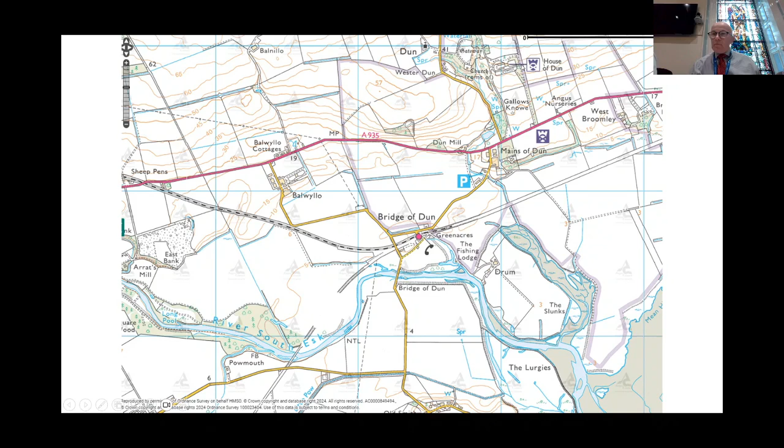Bridge of Dun railway station and the River South Esk, with Bridge of Dun located to the south, and Montrose Basin and the various environmental designations associated with the basin located at the south-east, or bottom right corner, of the slide that we see here. Perhaps also pick out House of Dun, located a short distance to the north-east of the application site, just again in the area identified by the cursor.

If we move on, we have an aerial image that shows the extent of the application site. Again, A935 public road running along the top of the application site, and the unclassified Mains of Dun to Balwyllo road running to the south. It's from the south that access would be taken, all vehicular access taken from this point to the west of the 3 cottages at Mains of Dun. So access taken from the point that we see here.

Again, just in terms of this aerial image, you can see significant woodland located in the top right-hand corner of the slide. This provides a significant screen between the proposed development site and House of Dun. So House of Dun, an important listed building, but there is very effective screening between that property, between the policies of the listed building, and the application site itself.

I've mentioned the Mains of Dun cottages, just in the area identified with the cursor, and we have Dun Mill located just again in the area identified by the cursor, and I believe we have a speaker from that property who will address committee later on.

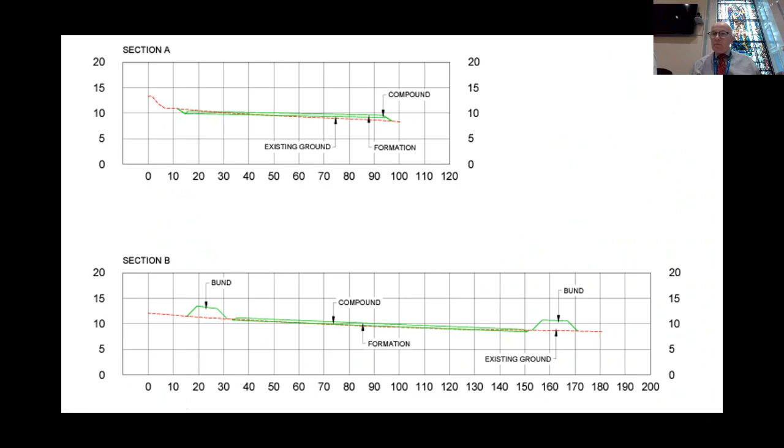Two access points taken from the main access track. Some concerns raised in objections regarding safety and reference to Fire Chief's guidance. Fire Chief guidance suggests 2 access points to the compound in order to deal with any emergency situation that arises. Again, that guidance refers to a minimum 25-metre separation distance between battery container units and any neighbouring habitable property. In this case, the closest habitable property is around about 250 metres from the application site.

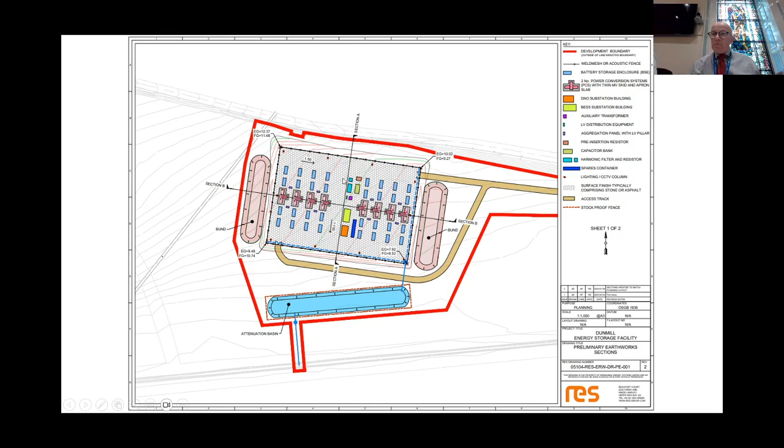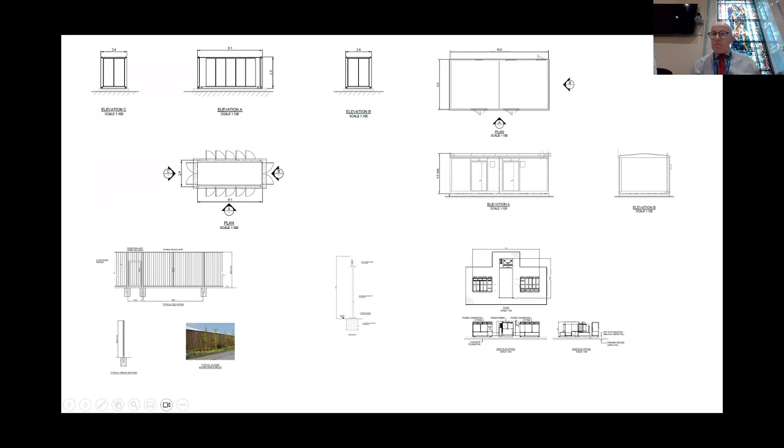Just in terms of the apparatus itself, won't linger too long on this. We have the proposed storage container unit, a fairly standard unit that members are now familiar with. A substation type building would be the highest building within the site at just under 5 metres in height. An acoustic fence would surround the development, roughly 3 metres in height. We have some CCTV cameras and lighting poles, roughly 4 metres in height, and you can see some of the other apparatus varying in height, roughly 2.5 metres, located within the development site itself.

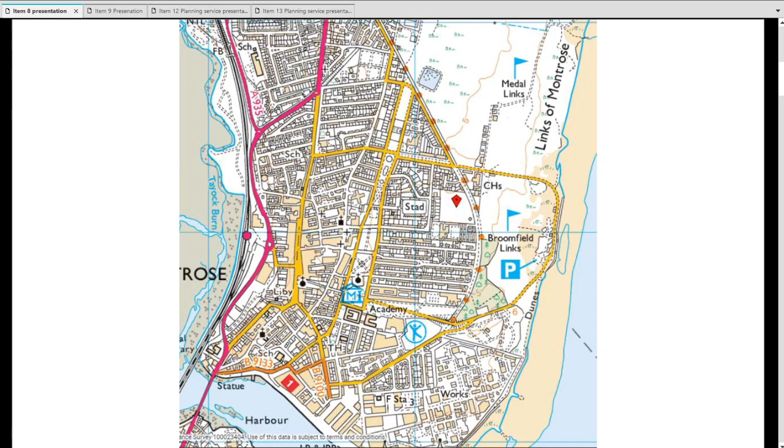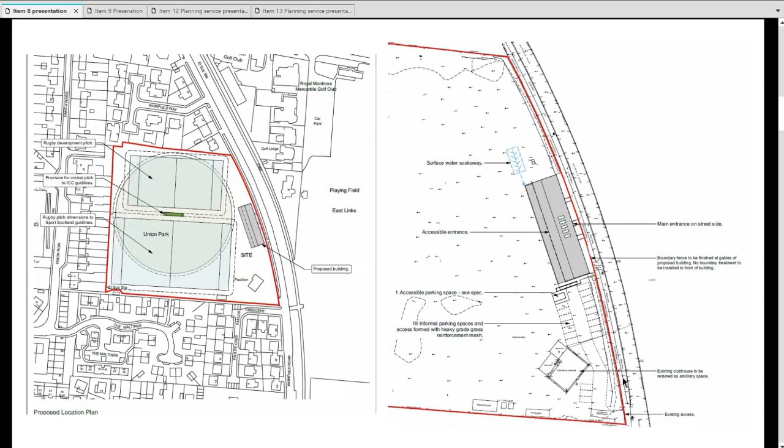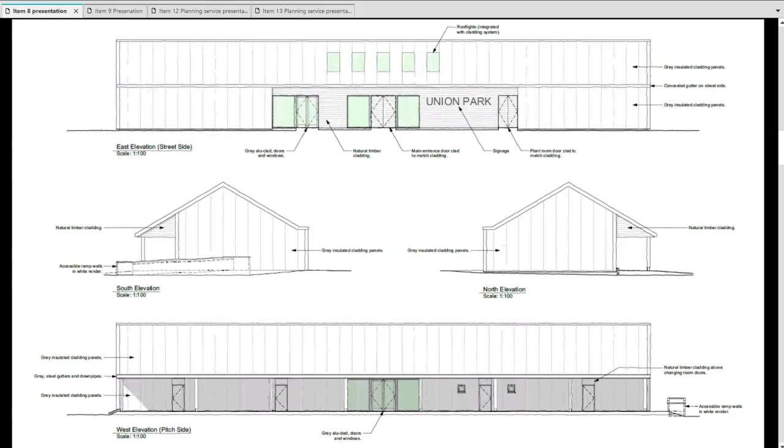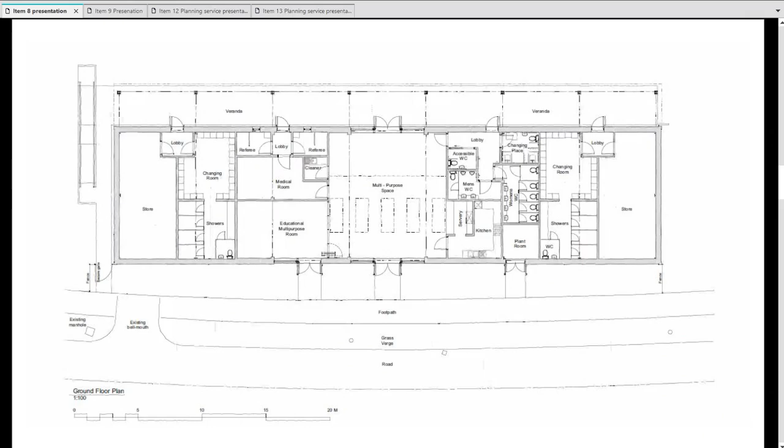Those circumstances include where the proposed development is ancillary to the principal use of the site as a recreational resource. While the proposal would result in a reduction of available open space, it would not adversely affect the existing sports pitch provision, and it would improve the facilities available for those using the pitches. It's ancillary to the existing sports use of the site, and Sport Scotland have raised no objection to the proposal. It is indicated that the building would also be available for community use, and in very broad terms, the principle of this development is acceptable in this location.

Two letters of representation have been received from residents located in proximity to the grounds. One raises questions regarding possible wider use of the site, including hours of operation and alcohol licensing. Some information on the anticipated level of community use and hours of operation have been provided by the applicant, but these are not matters that the planning system can control in this case. It is indicated that the building would not be licensed, but that's largely a matter for the licensing authority to consider if it receives an application of that nature.

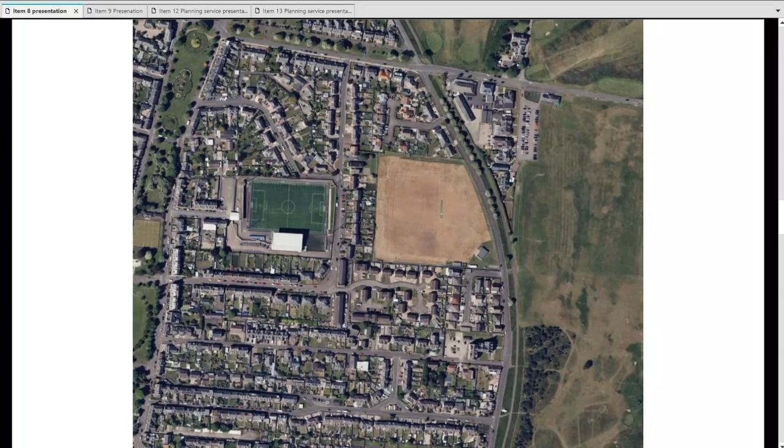Lastly, concerns regarding impacts upon access, parking and road traffic have been raised. The site is in a location that is reasonably accessible from the wider town by pedestrians, and there's also no designated parking within the site at present, but existing on-street parking is available on Whinfield Road for users of the existing sports pitches. As you can see here, this is Whinfield Road, where there's ample parking available on site. The proposal is unlikely to result in a significant increase in traffic, but the proposal would provide for 20 new informal hardcore on-site parking spaces, and a condition is suggested to ensure that these are provided. The Council's Road Service have considered the proposal and offer no objection, subject to the provision of 10 cycle parking spaces within the site. On that basis, it's considered the proposal would not significantly affect parking provision in the area or cause any significant issues in terms of road traffic or pedestrian safety.

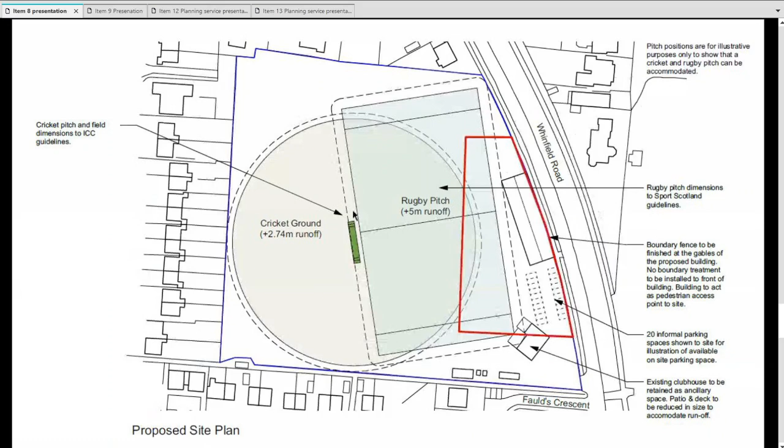This and the following slides relate to a very similar proposal that was previously approved by committee on the site in 2019. However, this permission has since expired. As you can see, there's a similar rectangular building with 20 parking spaces located in the east of the site, and the playing fields retained to the west. The building approved at that time was approved subject to similar noise conditions as those proposed in the report before members today. This slide here shows the elevations and layout of that building that was previously approved, and again the appearance of the building is very similar to that currently proposed. Although NPF4 has been introduced since that decision was issued, relevant policy considerations have not changed to any significant extent, and therefore this 2019 permission is a material consideration which merits some weight in considering the current proposal.

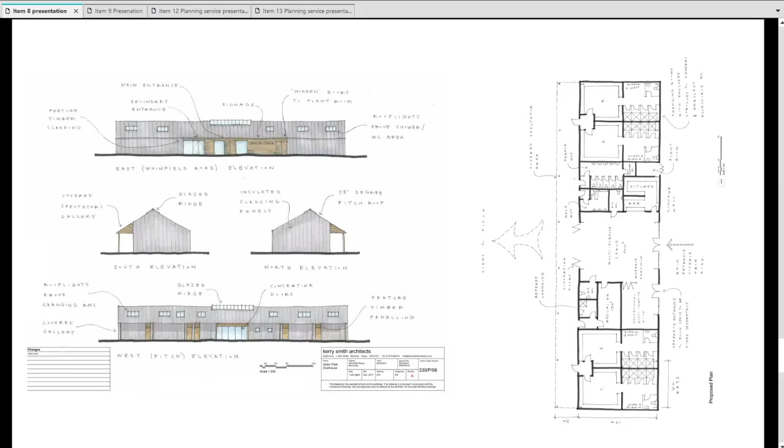Returning to the current proposal, the application relates to the erection of a community sports building within a site which is currently used for sporting activities and which previously benefited from planning permission for a very similar development. The new building might generate additional usage and greater activity in the vicinity, but this would not be unacceptable given the nature of the area. The building is located some distance from neighbouring properties and is of acceptable design, and concerns raised by third parties have been taken into account, and conditions are proposed to address those concerns where appropriate. Therefore, the proposal is recommended for approval, subject to the conditions listed in the committee report.

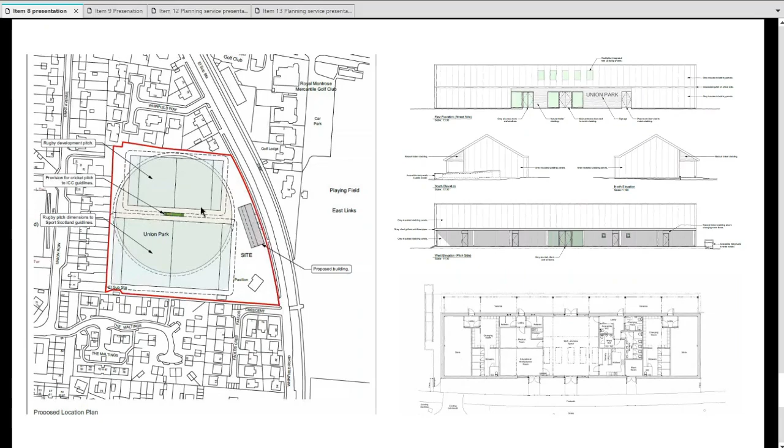Great, thank you, Ms Porter. Let's start off with any questions from members for Ms Porter. Councillor Durno.

Thanks for that, Stephanie. You probably won't be able to answer this, but maybe one of the local members can. How far is it from the nearest bus stop, and is it on a bus route? Obviously if children are going to be travelling at dark nights, we've got cycle provision and car parking, but how far is it from the nearest bus station? Children can now use their bus card and get free bus travel, so I just wondered how far it was for them to travel. Thank you. You maybe don't know.

Thank you, Councillor Durno. In all honesty, I don't know the exact location of the nearest bus stop to the site. However, it is within close proximity to the town centre and the associated transport links that will be provided there. I'm going to ask Councillor Duff to come in as local member.

Well, I don't know the exact answer, but I would have thought about half a mile away. That part of Montrose has got a rugby club and a golf club - most people who play golf generally arrive in a vehicle and not a push bike, but yes, there's quite a lot of sports facilities. The Montrose Sports Centre is not a million miles away, and you've got the tennis club and bowling club all in that vicinity. So I would have said half a mile will get you to the town centre, and it's a 5-10 minute walk from there. That's my local knowledge.

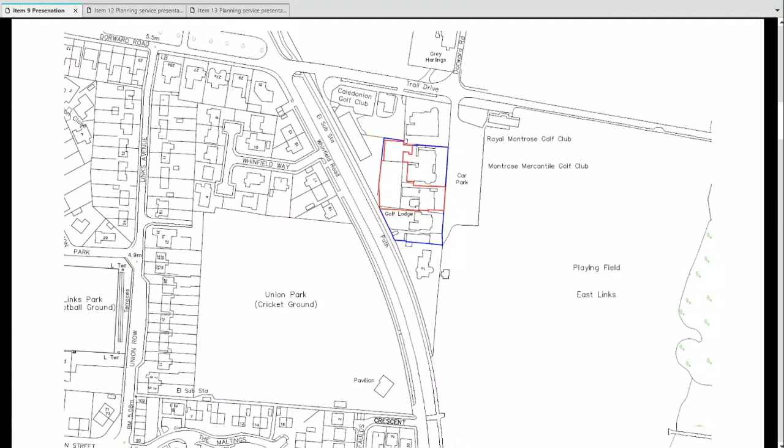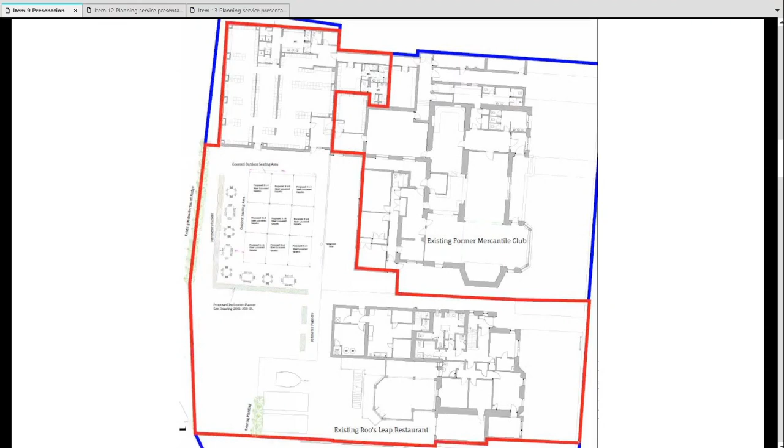You'll note that the application includes the rear section of the former Mercantile Golf Club building, this area here. It's not intended to change the use of this building, and this building is purely included within the application site in order to allow the toilets within the former locker rooms to be used to serve the outdoor space. A condition is proposed to prevent that area of the building being used as restaurant accommodation or for any other related use other than ancillary storage purposes, so the space is only permitted to be used to provide toilet and washroom facilities associated with the proposal.

The shelter structures have been erected in the position proposed by the current application, and in this respect they are retrospective. However, the applicant has advised that they're not currently in use.

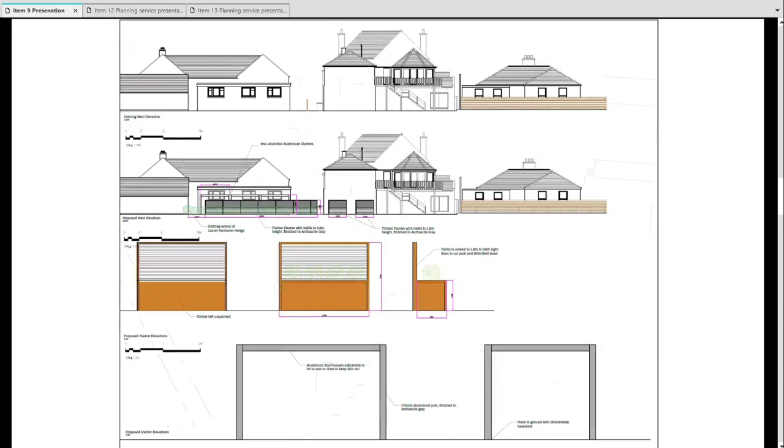This slide shows what the proposed shelters and planters look like in situ, viewed from Winfield Road looking northeast towards the application site, where the shelters are these lightweight grey structures. I apologise, I didn't realise this slide was a bit blurry.

The wooden planters are here and here with the planting above, and you can see the rear elevation of the restaurant building is the painted elements here.

There are no specific policies that deal with proposals for outdoor eating and drinking spaces associated with existing buildings, but policies are generally supportive of business and support economic growth.

However, the policy context is set out in the report before you, and in terms of visual amenity, as you can see from the image in front of you, the proposed structures would not have a significant impact on the character of the building or the wider public realm. The land on which they're positioned is reasonably discrete, and the proposed structures and the activity associated with them would not be readily visible from the surrounding public areas.

Therefore, the remaining key considerations in this case are impacts upon residential amenity and relevant planning history. In terms of planning history, two previous planning approvals are relevant to this application.

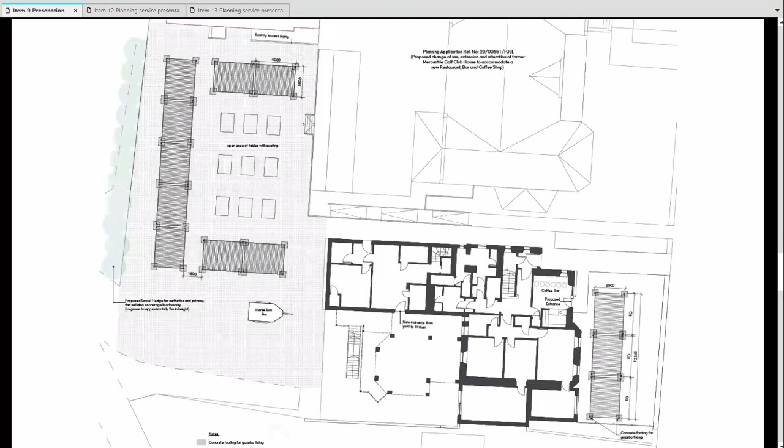The extant planning permission, which allows the outdoor area to be used for eating and drinking, is a significant material consideration in the assessment of this application.

In terms of residential amenity, the closest dwelling to the outdoor area is located to the south, roughly in this area. That's actually within the ownership of the applicant, and the closest dwellings to the west are a little over 30 metres away, but they are separated by Winfield Road coming down here, with residential properties in this area.

The closest dwelling to the north is separated from the outdoor area by part of the Mercantile building here, residential property here. Five letters of representation have been received, but these are mainly from properties on Winfield Road and Winfield Way on the left-hand side of the image.

The main concerns raised relate to loss of privacy and amenity, noise and nuisance. A number of comments were made in relation to amenity impacts arising from previous music events and amplified noise taking place on the site. Some of these objections also note that if conditions attached to the previous permission were reattached to the current proposal, they would have no objection to the development.

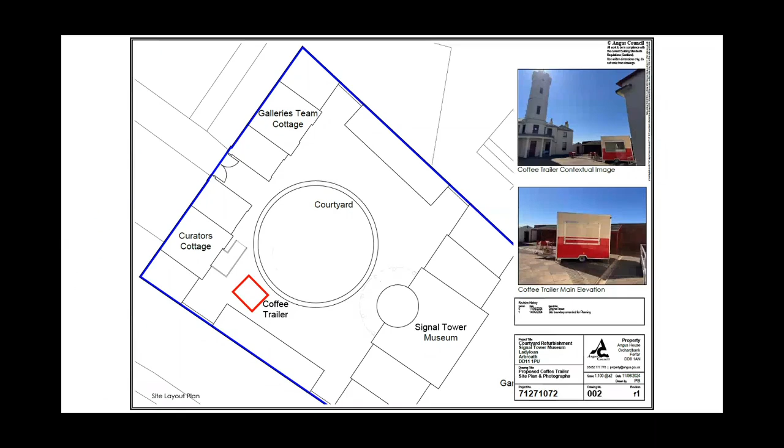Key consideration in relation to this application is whether it gives rise to any adverse impact on the setting of the listed buildings, or indeed whether it gives rise to any wider amenity impacts on the area. You perhaps see from this slide, it's a very small area. It's providing a coffee facility which will serve visitors to the museum premises. Not unusual for people visiting a museum to get themselves a cup of coffee, and this does not give rise to any significant adverse impact on the wider setting of the listed buildings or the wider area.

You can see it's enclosed within the courtyard. The courtyard could in fact be used for the parking of cars. In this case, it's just to allow the siting of the trailer. You can see from the entrance from Burnside Drive, trailer itself is not visible, so no wider visual impact issues associated with the development. In terms of the wider area, coffee trailer is going to be round about 70 metres from the closest residential properties, which sit next to the Bellrock Fish and Chip restaurant. So the coffee trailer itself is unlikely to give rise to any significant adverse impacts on the amenity of the area, doesn't adversely affect the listed building or its setting, doesn't give rise to any significant issues in terms of development plan policy, and is recommended for approval.

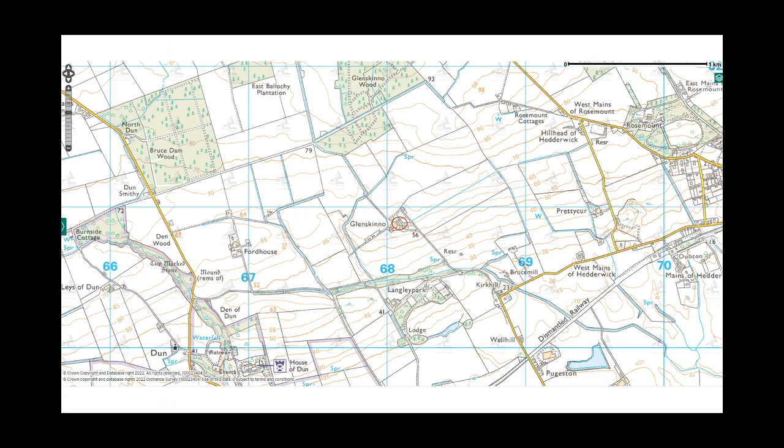We have the general location of Glenskinno, to the west of the village of Hillside, and House of Dun located a short distance to the southwest. Here we see the footprint of the existing building, part of a former farmsteading, and this committee granted planning permission to allow this element of the building to be converted into a dwelling at its meeting in November 2022.

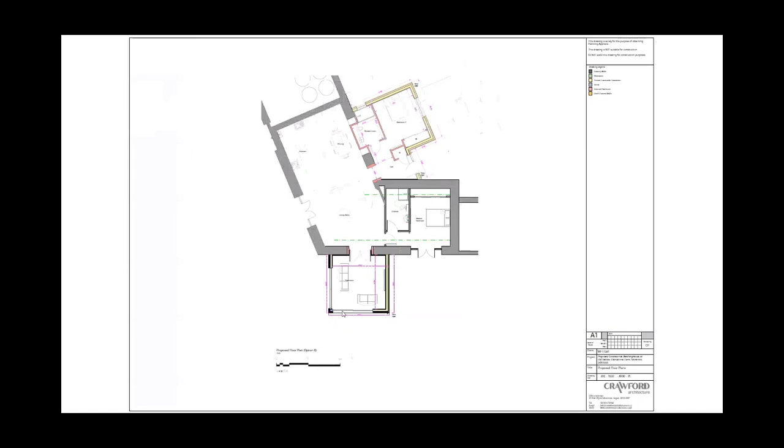You see the extension to the east elevation in the area shown here, and the extension to the south elevation in the area identified by the cursor. Here are the elevations of the proposed extensions: the south elevation, the extension onto the main elevation, and the extension on the east elevation. In general design terms, they're perfectly in keeping with the character of the existing building.

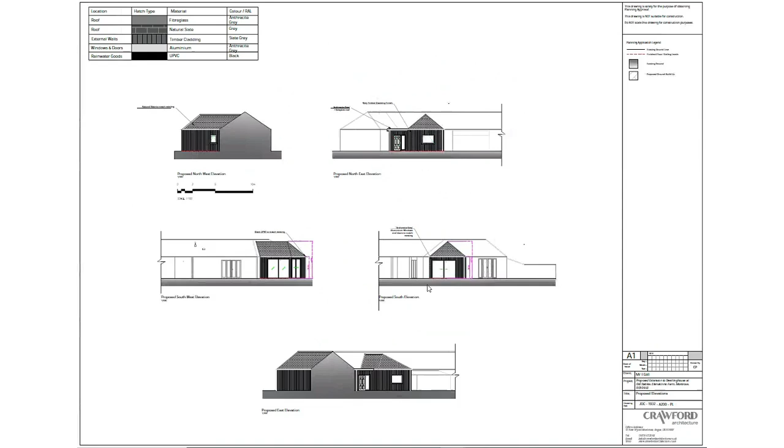The proposal complies with development plan policy. You'll see there's an updated bat survey being provided, and there are some conditions attached dealing with potential impacts in relation to bats. But overall it complies with development plan policy, complies with our design guidance, and is recommended for approval. Thank you, Convener.

Thanks, Mr Hunter. Have any members got any questions for Mr Hunter on this? None in the room, none online. Okay, thank you very much.

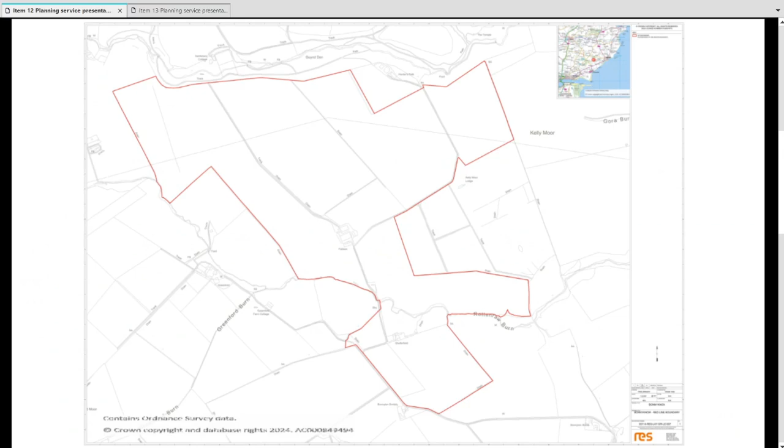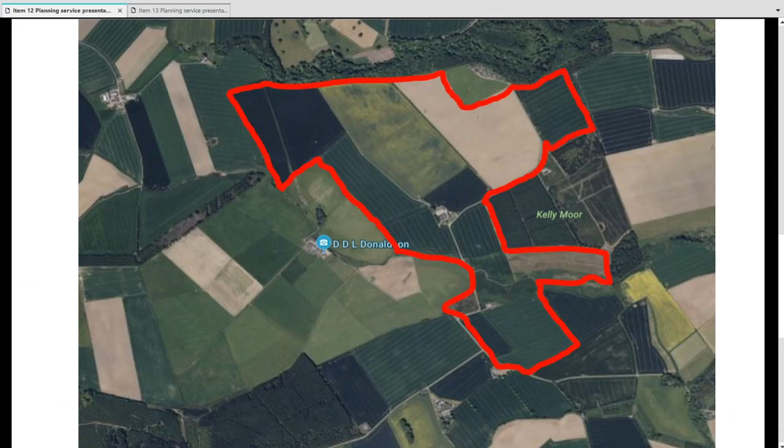Thanks, Steph. This is looking at a substantial site. Do members have any other issues or concerns they wish to be considered, in addition to those already shown in paragraph 4.4 on pages 155 and 156 of our papers? Looking at these key issues, is there any other ones people want to bring up? Nobody here? None online? So we're all happy in that case. Are the key issues noted? Noted. Thank you very much.

Agenda item 13 relates to report 227/24. Again, a proposal of application notice, this time on behalf of Muir Homes Limited and Scotia Homes Limited for a residential development and infrastructure landscaping of fields, 280 metres west of Westfield House, Westfield Loan, Forfar. And again, I think Ms. Porter, you're about to address this one.

Yep, again, just a brief presentation to set out the context of the site for members. This proposal of application notice relates to proposed residential development with associated infrastructure at Westfield Loan, Forfar. The application site is the red line in the image before you. It's maybe worth pointing out that the majority of the application site is located within land allocation F4 within the local development plan. However, there is one field located outwith the development boundary, in this area here. If I just switch to this slide, you can see the field that I pointed out in the previous slide.

That's just this one here. So it is out with the development boundary, but it still is within the wider F4 allocation, which safeguards the area outlined in orange for residential use at a later date forward of 2026.

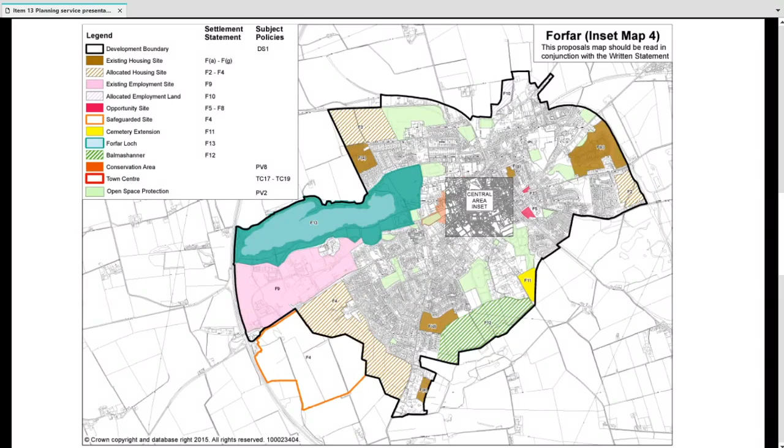Again, officers have identified key considerations that they consider relevant to the determination of any future application, set out in paragraph 4.6 of the report. As you'll note, it makes reference to relevant planning history, as there have been a number of previous applications at this site, as well as site constraints and noise and traffic impacts. These are all highlighted in paragraph 4.6, but if members wish to highlight anything else, we welcome them to do so.

Thanks, Ms. Porter. The recommendation is for the committee to note the key issues and any further issues they wish to be considered. Councillor Duff, we'll start with yourself.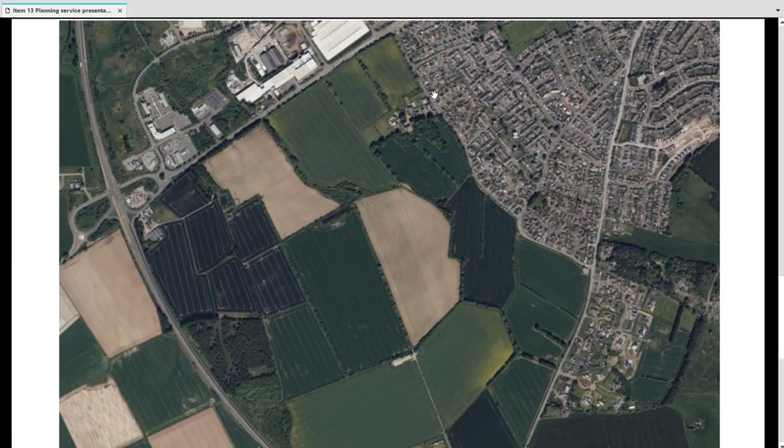Yes, thank you convener. This is one we have seen before, or something very similar, and I'll make the points I've made previously. The thing that really concerns me is the Lochlands Junction. I think it's inadequate and potentially unsafe, and really in the 21st century we shouldn't have a junction like that entering a settlement the size of Forfar, and that needs to be resolved. I would very much want to see that linked with further development in this area. I'm sure that is mentioned in the paper, but I feel quite strongly about it. I think the council and Transport Scotland need to get together on this and make sure we resolve that issue, because good road safety is important, and it's built on sound design and sound engineering, and I think we need to do that.

Very aptly put, Councillor Duff, and I concur 100% with everything you just said. Councillor Melville?

Yes, thanks convener. I don't have an additional issue, but I do want to comment on one already raised. I'm very glad to see the issue of health infrastructure highlighted there. I've been banging on that drum on this committee for a while now. We all know that new housing can impact local healthcare settings, and where we can, we might seek to mitigate that with developers' contributions. So I'm very pleased to see that included.